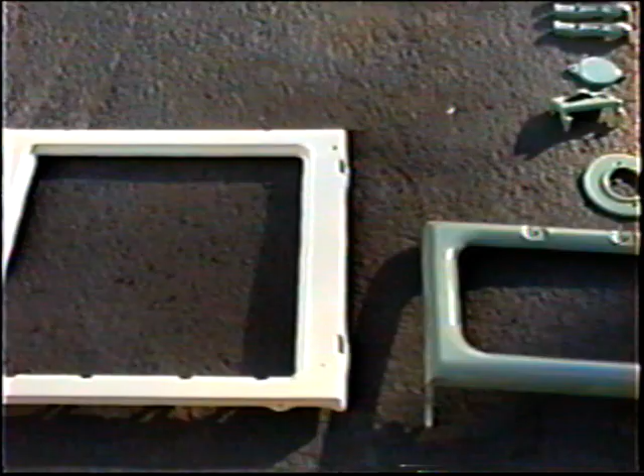I have to tell you, if you think I'm kidding, and this is really why I'm putting some of this on tape, this is Rust-Oleum Appliance paint, and you can't believe how nice this looks. With only one coat, I am even amazed. They're going to put me out of business here. This really does have a nice gloss, it dries up in about a half an hour. And we've been able to match the original Stewart colors pretty accurately anyway.

We're going to have all new brass screws when we're all done here, all new hardware. And what we're going to try to do is the back of it, this is going to be a breakfast bar, and the back part is going to be a wine rack.

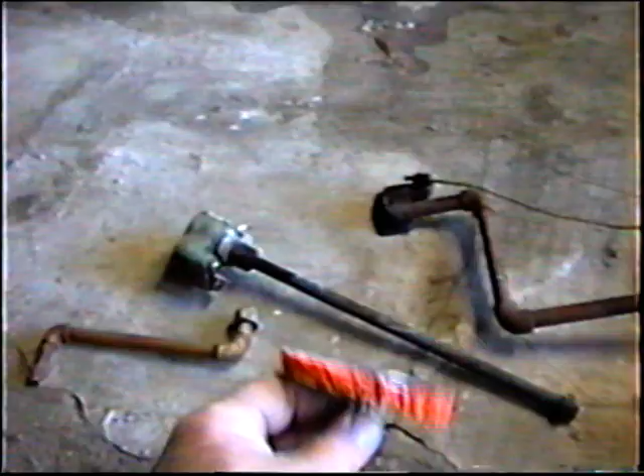This is that little thing we got for Christmas we're going to try using on getting some of the heavy rust off of these parts before we paint them.

Too bad they don't have a concours stove award. Maybe we'll get one at this year's Nats.

Looking forward to trying some of these new tools that I got for Christmas, and that's one of them.

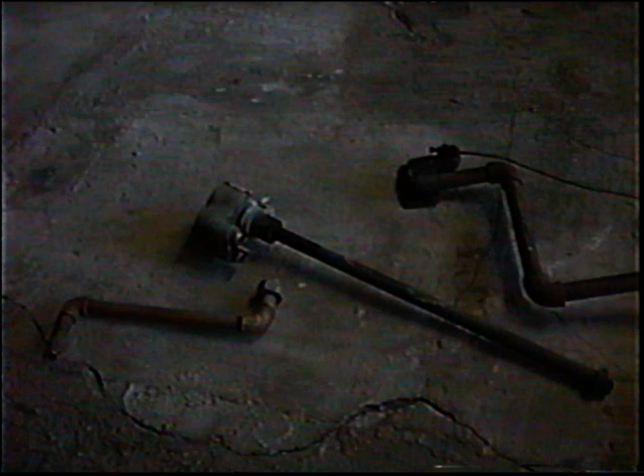These parts, it's really literally a lot of work going into grinding these down. Maybe a couple of days worth until...

Okay, well, actually what we found out was the little Dremel tool was the best thing for scratching it up. It was even better than an orange brush.

All right, it's getting dark. Bring the rest of the parts downstairs, and that'll probably be it for today.

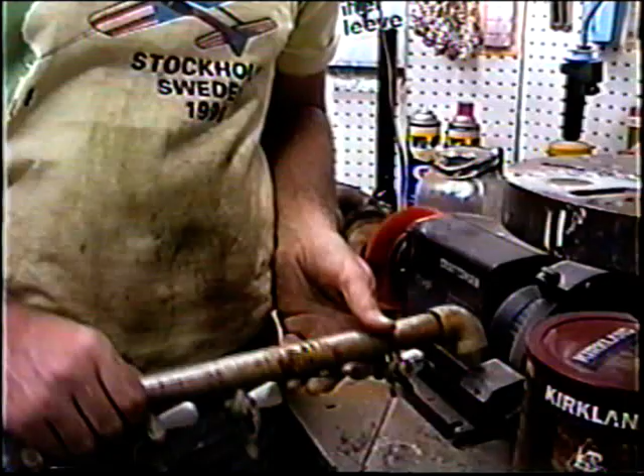Yeah, just let's get it scratched. This is fun. Anytime you want, come on over, I'll let you refinish your parts.

By the way, this orange wheel works great. This gives you an idea how quickly this comes up.

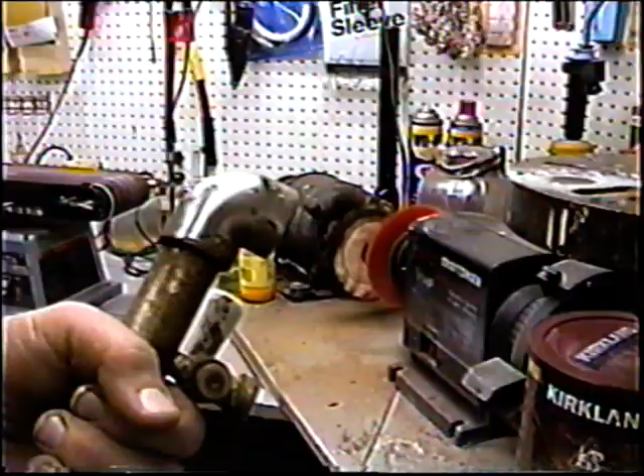Yeah, that Dremel tool cuts right in there, much better than that orange pad.

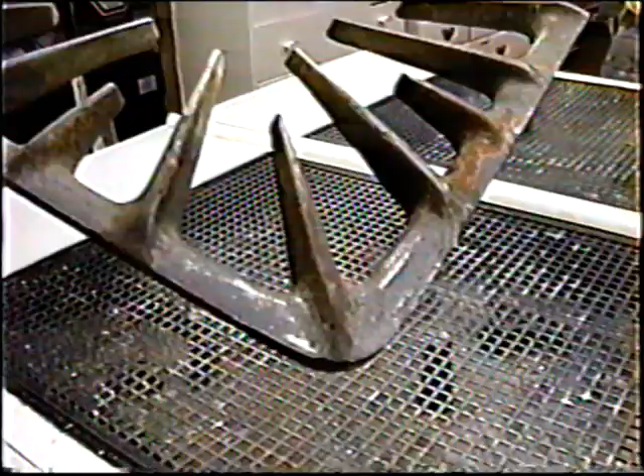I tell you, this Rust-Oleum appliance paint, absolutely beautiful. And it's coming together, maybe another day or two. The green dried up nicely today, and this gold is just spectacular.

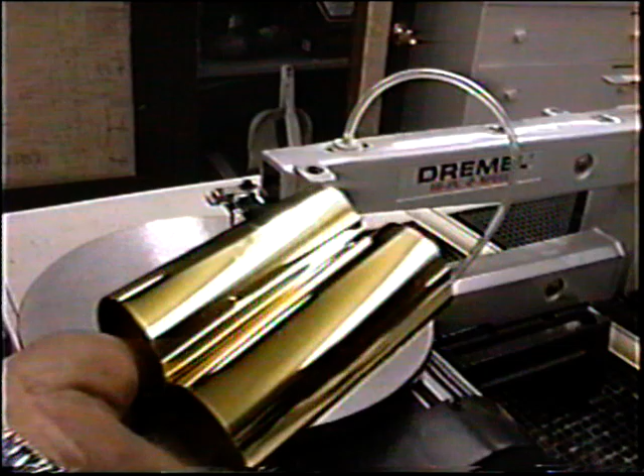Today I had to make some real precision cuts on this. I have to tell you, we got this saw for Christmas, Karen got it for me, and I've really gotten good use out of it. This is an excellent value in tools, even if you're making airplanes instead of stoves.

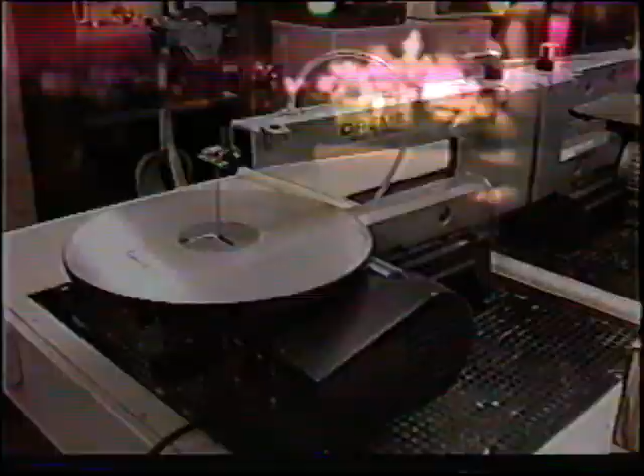Yeah, we've been working all day, all night. Little by little, you can see the fish are coming to life here. We even had a frog, found one in here before. One frog survived out of 12. Where the hell is he?

Anyway, but another day, check this out. Anybody who doesn't think I'm a workaholic, look at this. It's already way past bedtime. Got this guy put together. I'm putting on the side brackets. George gave me a hand before. Getting ready to make up the wine rack, and these are the pieces that go in there to hold up the glass.

Anyway, if you don't think this is a labor of love, Karen came home from work. She was so happy, she just couldn't believe how happy this stove was making her. And everybody knows how much I love Karen. Look at this, a lot of work.

Even a door, two-tone door, got the original Stewart emblem on it, and about 8 million more brass little screws and things to put in here. But I'm really looking forward to seeing this thing in one piece and getting back to the world of model planes. Closing in on having it done. I think it's really going to be a nice little focal piece for our new kitchen.

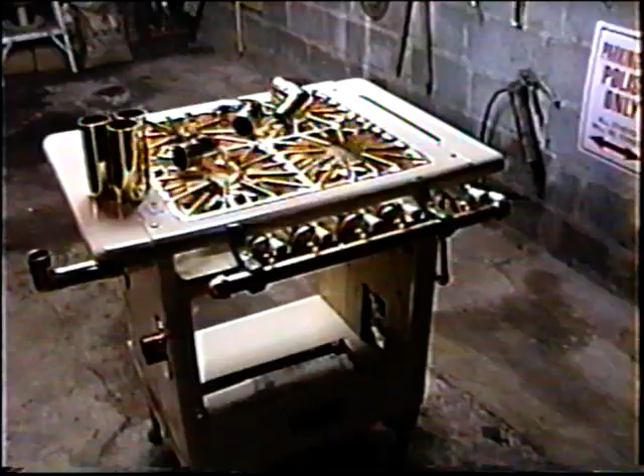We lined the whole inside of this with 3/4 plywood because it needs to be real solid, and that worked out real well. Then at the end of this there's going to be some brass supports when these all get tied in, giving it a real nice look. And then when it's all done we have to order up a piece of special cut glass with a bevel edge.

The first time every year that we open up the pond, which we did this last weekend, I get to see the fish swimming around again. Oh man, I'm telling you, if you never had a pond, you don't know how relaxing it is to just sit out here at night. And the other part of it, you don't know how much work it is. You gotta clean this damn thing out.

It was 2 days of solid grunge, munge, hip boots. But tonight I'm gonna sit out here, order up a Domino's pie, sit out here like a king on his throne with my subject fish. They really are fun, Karen and I really do enjoy this, and I'm glad I can share it with you. Life truly is more than just model aviation, but model aviation is nice too.

I really don't know what it is about fish that's so relaxing, that at the end of the day's work it's just nice to sit out here and check out all my guys, see how they've done over the winter. Looking for that frog, he was out here before. There's just something special about fish, I just don't know what it is. I'm really not sure myself.

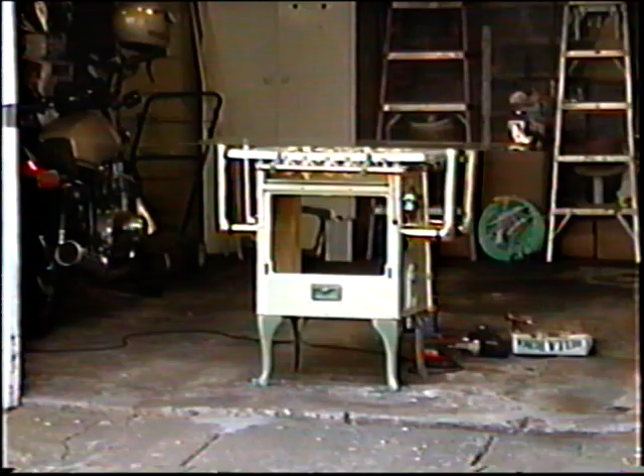Well, I've been trying to lay out the wine rack. The only problem is I only have one wine bottle, maybe I should make a WD-40 rack. Trying to lay out the wine rack, but this is not the real glass, I just used that to kind of level this off. By the way, I never figured I would need some special copper glue to glue these pieces together. So this basically is just down here so I can show Karen when she gets home from work. It's wine rack time, even when you can't go flying, you can always make a wine rack.

We're in the heart of beautiful downtown Carlstadt at the Venturini shop, right in the industrial park, the new home of Aerosmith Model Aviation, now with the Kyle Freeman paint job on the walls.

I wanted to sneak up on this old geezer. I like my old van, it's still in one piece, believe it or not. See if this bozo's running around in his underwear or something. Look at it, his professional job, he has Aerosmith.

Look at this Nobler. Wow, looking good, like a real shot before I come in. Yeah, real work.

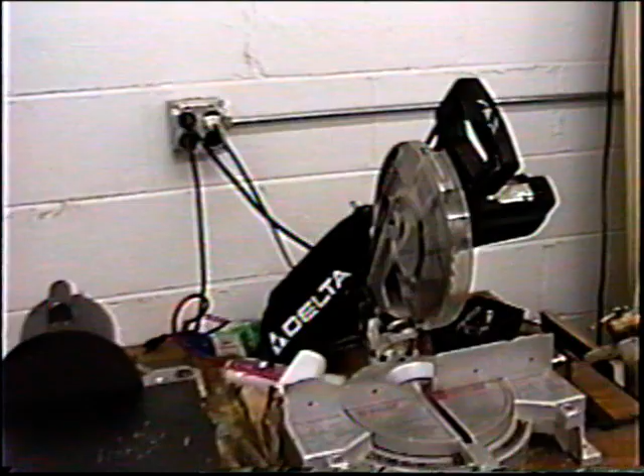I got to take my chop saw, I got to do the saw. Oh, got to finish that stove. Get back to modeling.

Now, I know everybody is probably good and sick of watching me make Nobler cowlings, but again, my philosophy is you always should be in the learning curve, always in the learning process, always trying to upgrade your techniques. Today I opened up the mail, Ed Gallagher sent me 2 more really informative videos, and they basically comprise molding a carbon fiber car body for a college that was trying to set the world's record for mileage, 1,000 miles a gallon.

It's a super nice video, and in fact there's 2 videos. I'm going to try to make a copy to loan out to anybody that would really be interested in looking at this. Or, of course, you can get them right from Fibre Glast if you want to own them. Both of those are good quality companies, by the way, Fibre Glast and Ed Gallagher - needless to say he's been a big part of everything that we do with Fibre Glast.

He's been real informative, helpful, and I noticed another package of his in today's mail. We probably got 2 in one day here. But anyway, I wanted to bring up a point. As I'm watching this video, I'm learning as I go. These people, now these are the professionals of the industry.

These are people actually holding classes, teaching people for $300 a day how to make composite parts. These people are having exactly the same problems I had. In fact, they screwed up the mold 2 or 3 times. They had to change materials halfway through making the plug. They basically ruined the mold a couple of times, had the same problems that I've had. And you know what makes me feel good is they're doing it, of course, in a big industry. Anybody that's familiar with cars knows that everything to do with automotive racing is multi-million-dollar.

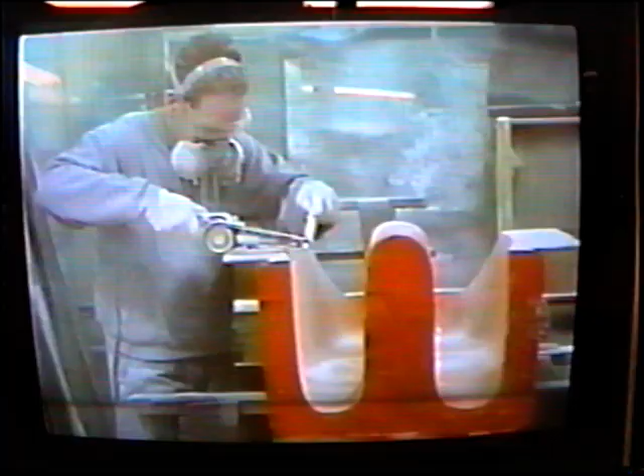We're trying to make relatively inexpensive parts. They're making a part that's probably cost a tremendous amount of money. But anyway, excellent, excellent information. This is the only part of the video. Now he's making the lower shell and the upper shell here. Again, if you have any interest in this, there's always something you can apply to your own modeling program, and I'm always glad to share any of the videos that I have in stock.

Now just a shot of the new mold. We're going to pour the rubber tomorrow. I'm letting some PVA dry on it. This is the one that we've got functioning now on a regular basis. But again, we're trying to make each one even better. You can see this one has put a little more polish into the surface, and I put a little bit of extra PVA just to see if this would make for a nicer finish.

Now, these are the 2 videos, and this is the little car that they're making, the shells. But again, if you have an interest in this, it's very difficult unless you have a source of somebody willing to help you or a video to help you. The education in this case is very difficult to come by unless, of course, you work in the industry.

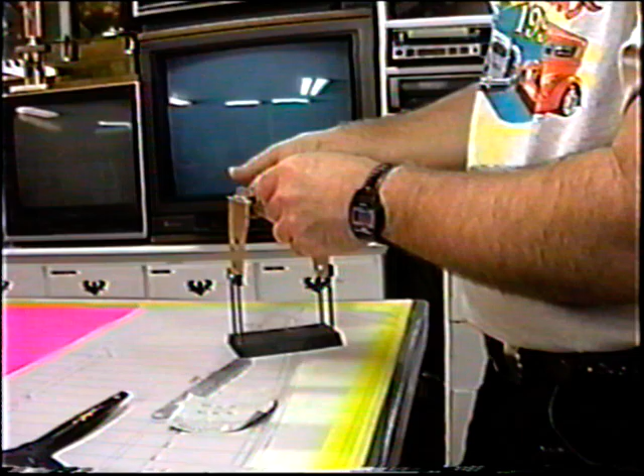There's nothing dumber in my book than you wait for this perfectly good flying day, you get up to the field and the props aren't - oh there we go - props aren't balanced.

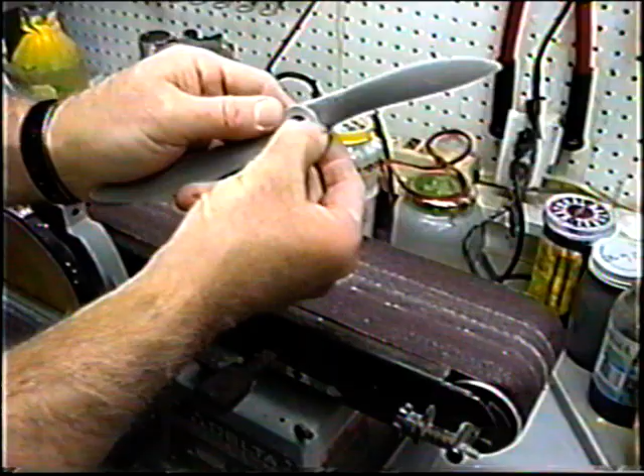Another thing with these props, you'll notice they have a perfectly smooth hub. Oh boy, is that an accident waiting to happen. And what happens, you need to over-tighten them, and this just becomes a clutch face. It gets smoother and smoother.

So I always have a little engraving tool, by the way these tools are about 15 bucks. This is a tip that's worth its weight in gold. Takes you 2 seconds to do this - that's a very cheap insurance policy.

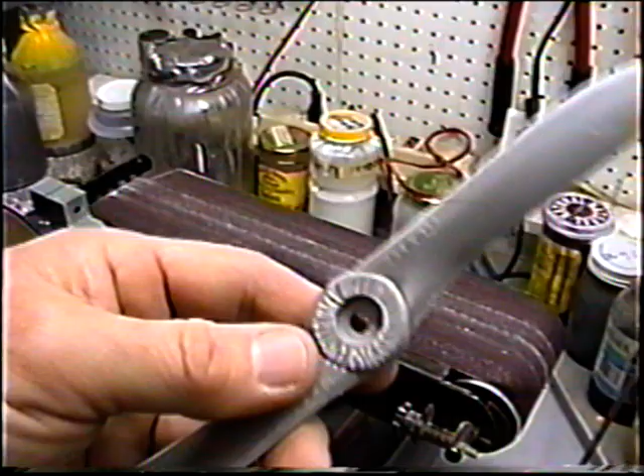Now it's like a sunburst, so what happens is these little roughnesses or rough edges tend to interlock, and you don't have to tighten the prop anywhere as near as tight. It also avoids the prop coming loose after the motor backfires or spins, and this thing will come off, the spinner comes off and hits you in the nose or something. Very, very cheap insurance policy to do that.

All props, all prop washers, all faces should be as rough as possible to get a good bite. Now, especially the back side, you notice the way these APC props are made. Let me just get this done.

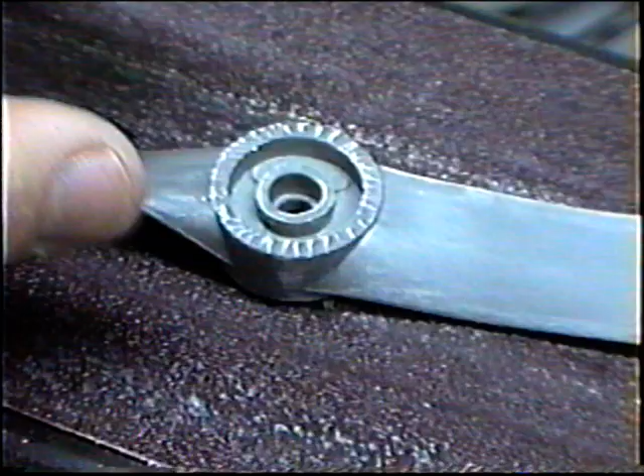Now, this is a great idea. It saves a lot of material by not having to fill that cavity with glass nylon. But look what happens here - you don't have any surface area, and that can be a problem. Obviously what you'd like to have is a surface area 10 times this amount.

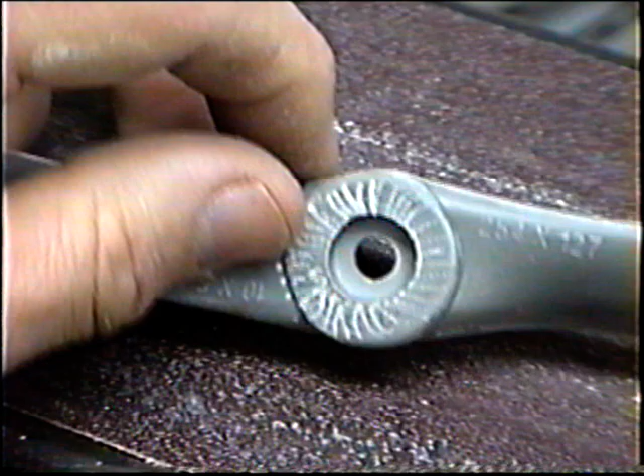Well, you know, the engineers have outdone us. Having these surfaces rough is really, really a good idea. That'll really save you a lot of aggravation. A great tip. And this doesn't even matter if it's a wood prop - I don't know if I mentioned that. But whatever, just get any surfaces that you're going to tighten into and compress and try to make a clutch face out of.

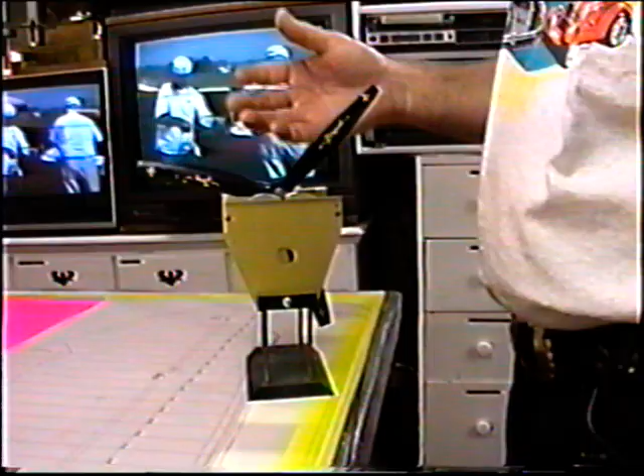Okay, one of the things - this is a Zinger 10-6. I got this from John Brodak. I want to see how these props balance. Now, you never can even assume that a prop's going to balance. Balancing it is the owner's option. But a 3-bladed prop's a little more complicated. You want to decide what actually is going to happen. Hopefully, we'll take the weight off 2 blades and make them as light as the lightest blade ultimately.

And there's a lot of ways to do that. But the first way is find the blade that's the heaviest of all. Right now we're looking at one blade that's a whole lot heavier than the other. I don't even need to go any further than that - I can see whichever one points down is going to be the heavy one here.

I can start taking material off the back of this, but the first thing I'm going to do, because this is a nylon prop, before I even balance these - now, you might want to scratch in a little number on a prop, 1, 2, 3. That always seems to help. But boy, get rid of these razor edges, no matter what.

And of course, if you're going to test 3-bladed props, keep in mind a 3-bladed prop is a prop and a half. Everybody thinks, oh, you just put a 3-blade on, it doesn't make any difference. It's a 50% more load on the engine. And typically, engines that like 3-bladed props are more like the grunt and groan type.

I just want to confirm which is the heavy blade here. It's real easy to figure it out too. And I'll just start taking material off the back. Get as much of it out as far to the tip as possible.

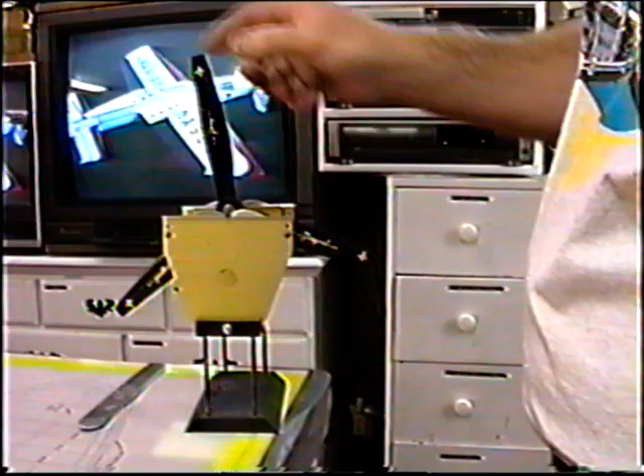I don't know if you can follow through with this. This is going to be the lighter of the two blades all the time. So it's going to ultimately be these two blades that have to be dressed off. So of the two that are heavy, which is the one that's going to be the heaviest of the two? Whoops, it's the one we're still working on. So again, I just have to keep hammering away, taking material off. But what will ultimately happen is two of these blades will become as light as the third one.

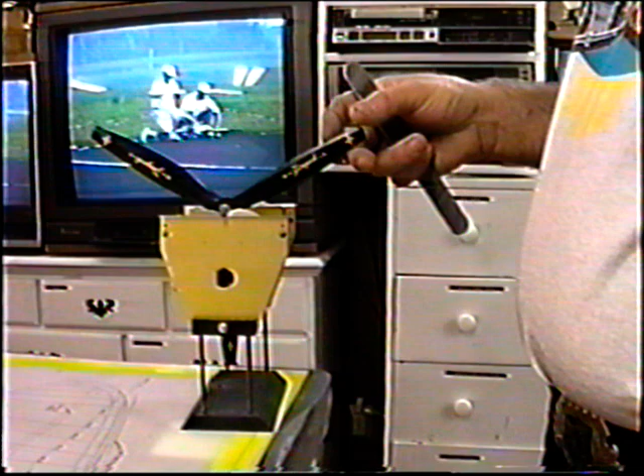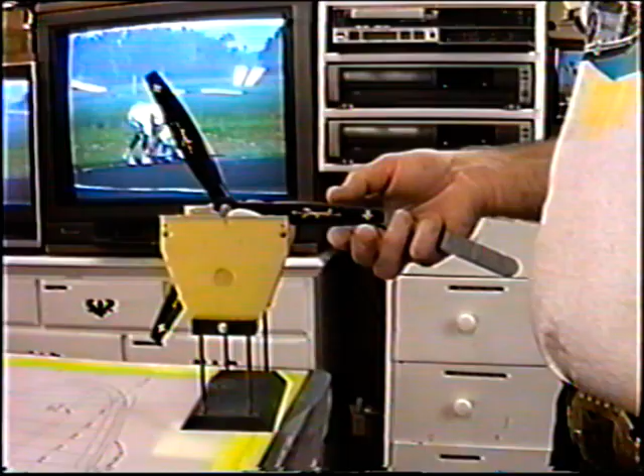Okay, now I've got the two that I'm working on. These two are roughly equal. These two are roughly equal. I want to go to... oh no, see this is now the little bit heavier. So now I know these two are the ones I'm going to have to work on.

I just hope anybody that buys one of these props or uses one, especially if you buy Bolly props, needs a lot of hand dressing. They're made, they're sent in a rough form. They're excellent props, they work excellently. But you need to hand finish them. You just can't take them out of the box and use them. And knowing how to do this is a big help.

That's still heavy. That's heavy. So this is now my light blade and my two heavy ones.

You can see as you sneak up on this, we're getting down to the home stretch. You want to always marry those two blades. This is still a little on the heavy side. A couple of swipes with the paper. Those two are now equal. Those two are okay. This one is a couple swipes of the paper on this one. I'll just radius the edge on this and we'll probably have it.

Now a lot of times you'll go too far. In which case, let's say the two blades that we've taken material off, you've made this the lightest blade. Well then of course you have to just go back. You're always working toward the lightest blade. There's no other way that I know of to do it accurately.

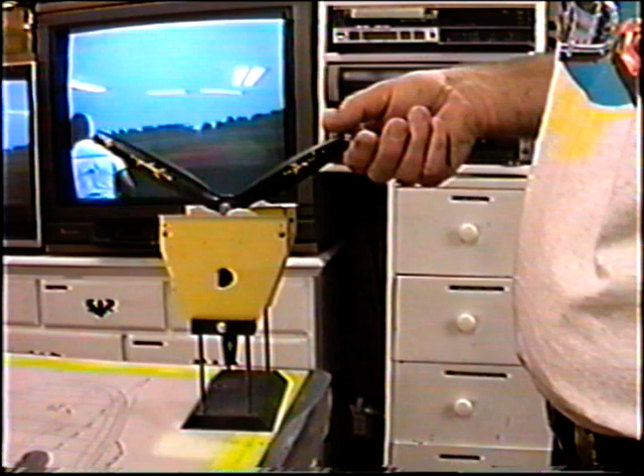This looks like the heavier of the two by a bit. That looks like the heavier of the two by a bit. Okay, and the last thing, of course, I want to mirror the hub the same as the APC prop. I'd like to see it in all three stations kind of equal. That one needs one more swipe with the paper.

You're always marrying the two heavy blades, trying to get them to the weight of the light one. Again, this took quite a bit of time. This took longer than I'm normally used to, but well worth the time, especially on a profile. And that one just needs one more swipe of paper.

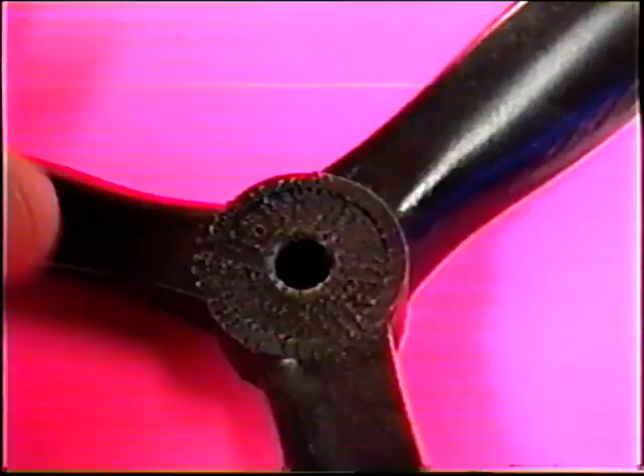You can see on this hub, and this is kind of another case of the engineers lost, the bean counters won this battle. This material should be solid on the back of this prop. You're losing all this surface area, which means you have to over-compress, over-tighten the nut, and the thing will have a tendency to come loose if you don't roll it. But again, a little bit of effort, a little bit of knowing how to get around that problem, and I hope we've just added two props to our collection for testing at K&B 40 with.

Let me tell you, I am so glad this project is nearing completion. This wound up taking a lot more time than I thought. The glass is on order and we've just put this away temporarily until the glass comes in, probably 2 weeks.

Well, it's spring in North Jersey. The forsythia are just starting to come out. Flowers are just starting to come out, and we're just starting to get leaves. Hey, motorcycles are even out. Starting to get some leaves on the trees.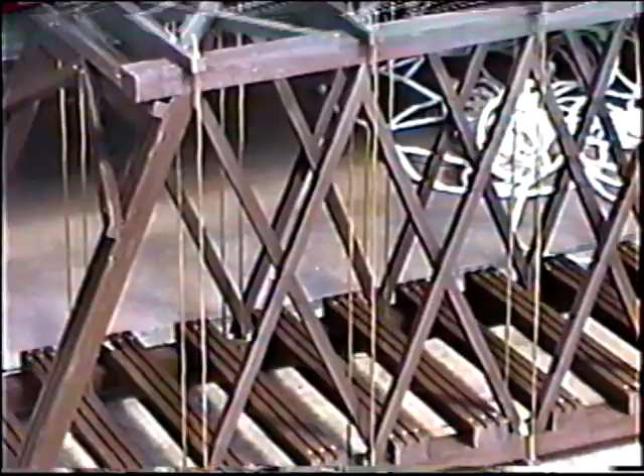See, here's a cool idea. They have the train run underneath a bench, and it keeps the rain off it. Isn't that wild? Look at this, they're actually making - maybe you buy these already built - a bridge that goes across the whole pond. Hey, we look forward to sharing this with you when it gets finished. Get busy - 2 bridges, 3 bridges, wow.

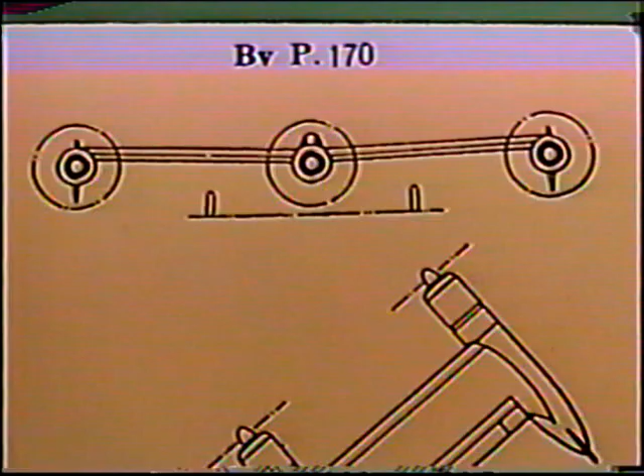This came from Larry Ladd. I just wanted to show this real quick. I'm sure Bandrock is watching this. Look at the 3 views on this. Kind of cool.

I don't know if anybody can read the caption, so I'll read it. It says, Windy, you said buy your grandson a Brodak Nobler and I'll give him a cowl - this is Larry Ladd's grandson Nathan. So he got an early birthday gift. He also has one of my pet Fox 35s.

Listen, Nathan, I got to tell you something. I sent you out 3 cowlings today, and what Larry said to send is some ones with little defects, and we got plenty with little defects. Don't worry about that, and if you cut them all up and chew them up, I'll send you another one. Anyway, look at these photos.

Hi, Uncle Windy. I got the kit. I need a cowl.

If John Brodak isn't watching this right now, John, I got to tell you, this is the future of stunt. Forget about all the nastiness. This is the reason we do what we do. But let me show you.

Remember that thing I just showed the 3 views of? Check this out. Nathan is working on this 3 19 McCoy powered BV P.170 semi-scale. Bandjock, all I can say is, this kid is going to blow you away. You are history. Bandjock's always trying to come up with these unique things - not even close. This is great. In fact, I'm tempted to send Bandjock some of these pictures.

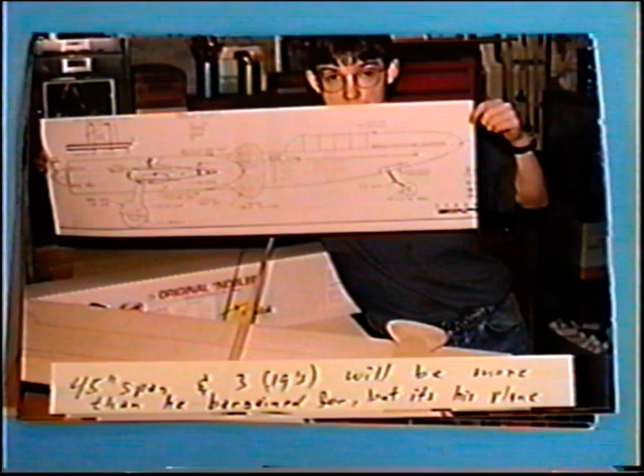3 19s. Look at this. Now tell me, if you didn't have a grandson like this, oh my God. Nathan, I'll tell you, if you make another picture like this - see this picture here? If you make a picture like this and put, Windy, send me a bell crank and horns, I'll send you a free bell crank and horns. I need the publicity. I'm not selling a lot of bell cranks today.

Nathan had an education with the Dremel, thinning the plywood, and the engine nacelles. Anyway, look at the work. Now, just think about it for a minute before you make a conclusion like this. Here's a young guy - this guy's like Mike Palko here. Non-standard pushrod horn connections, threading 440 onto the pushrod and securing with a shake-proof nut.

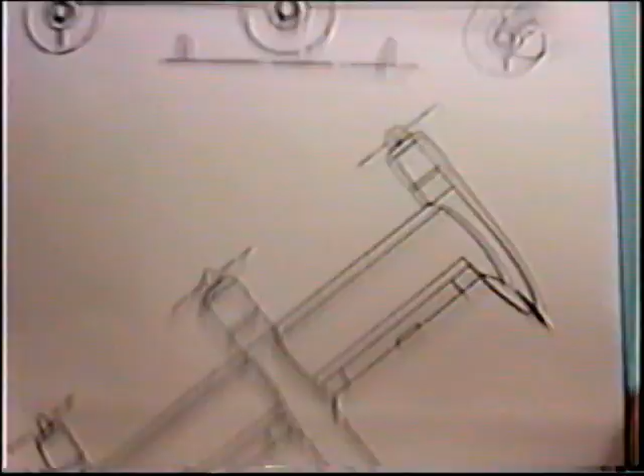Let's take one more look, Larry Ladd - I'm telling you, I am impressed. Larry, I'll sponsor this young man gladly if he keeps sending me pictures, especially when this is finished. Larry, I'm absolutely impressed. I wish we could get some video of this off of Wings. I know I've seen this on Wings, or something similar to this.

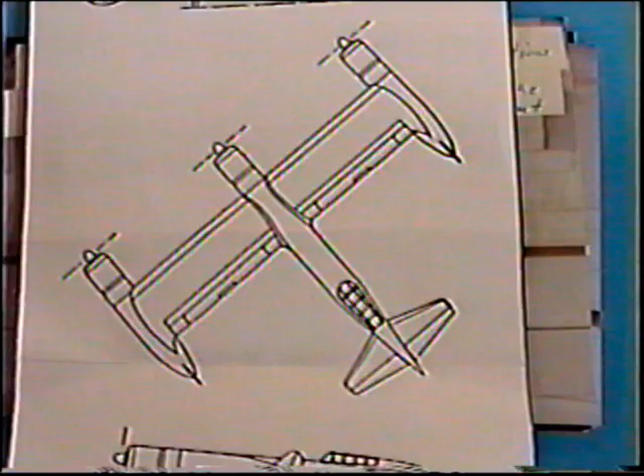Some of these wild German things that never came to fruition - is that a wild stunt ship? Bandjack, eat your heart out. That's all I can say. Larry, thank you so much. And Nathan, good luck.

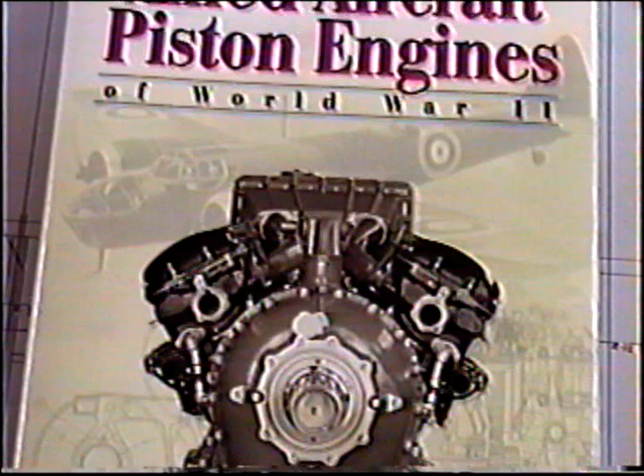This is the kind of reading material - I start reading something like this at 9, 10 o'clock at night and I don't get to sleep, I just keep reading. Brian sent us that video of the wood boats with the Allison engines, and a very long, detailed letter here, really too long to read on the video, but just to give you an idea of what kind of a book this is.

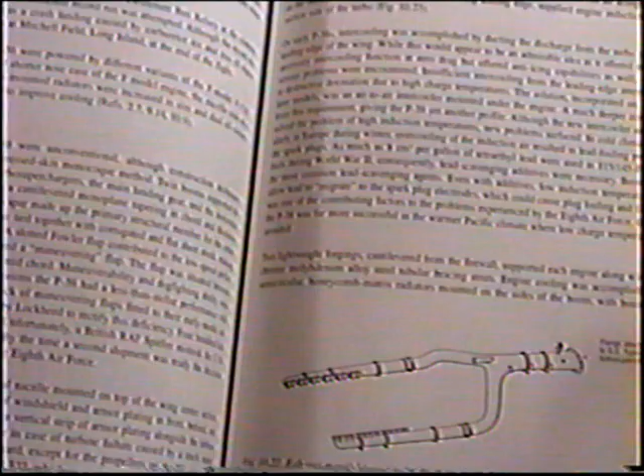There is just some really nice stuff in here, all the variations of these engines. Look at the exhaust systems here - I assume that's the P-38 with the rear turbos. If you have any interest, this would be a book that'll keep you up at night.

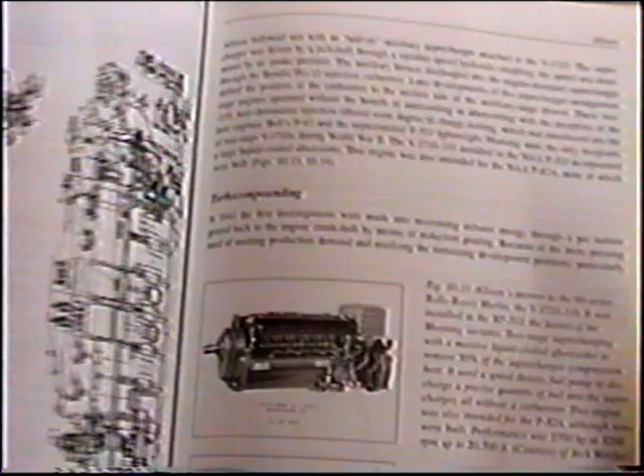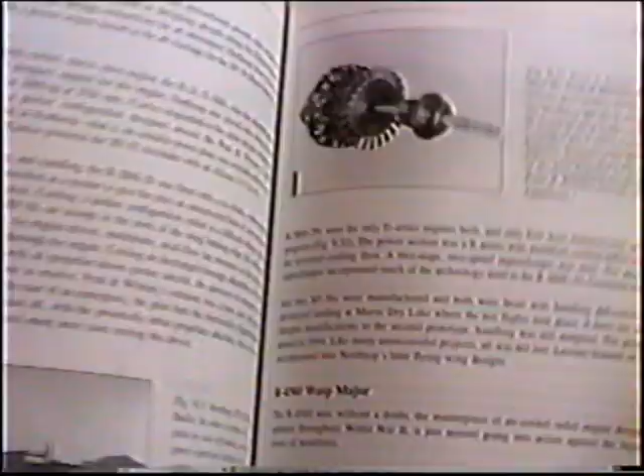This is the kind of thing, I bet the Julian Banjak will probably have it in their library, but there's just so many interesting things. And the thing that always impresses me about semi-scale is, once you get started in it, even with a little interest, it seems like it's an interest that never stops growing. Hey, Tom Morris's favorite plane, the P-61. So many nice things to think about.

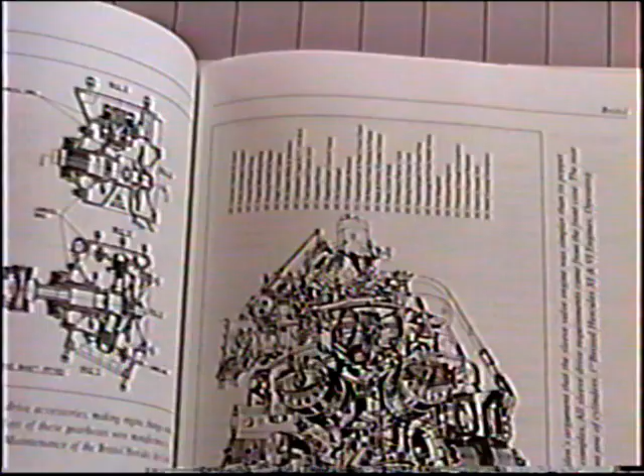Anyway, once you see - look at the Spitfire stuff. Just no end to it.

Now, speaking of unusual planes, Larry Ladd's son's Vultee XP-54. Nathan, I got to see that plane when it's finished. Look for those pictures in Stunt News, guys. I'll see if I can get Tom to print up a nice little write-up - in fact, I'll write a little thing up for him.

Until you realize the history of all the things that happened during World War II, until that history seems to make sense, it's always like a puzzle with pieces that don't fit, but...

Something you don't see that often - a B-17 with V-1710-89 engines. The prototype was destroyed as a result of an in-flight fire and the project was killed. Now look, can you imagine if that had worked out? Spinners on a B-17.

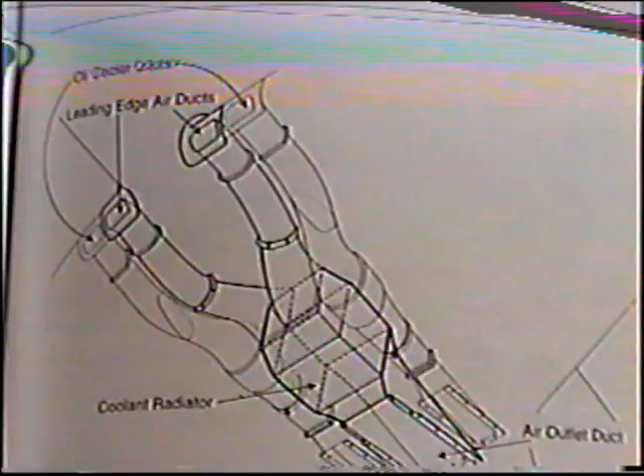Another model that would make a great semi-scale model - the P-39 Airacobra. Here's the kind of interesting thing you never really know unless you do some of this research: the cooling system on a P-39. The air got ducted from the leading edge of the wing through the ducting and then out a drop door behind the wing. I had never even known that.

Hey, by the way, Banjock, think about something - a P-51, you could put British roundels on that if you want to. And I could make an American version of the Spitfire.

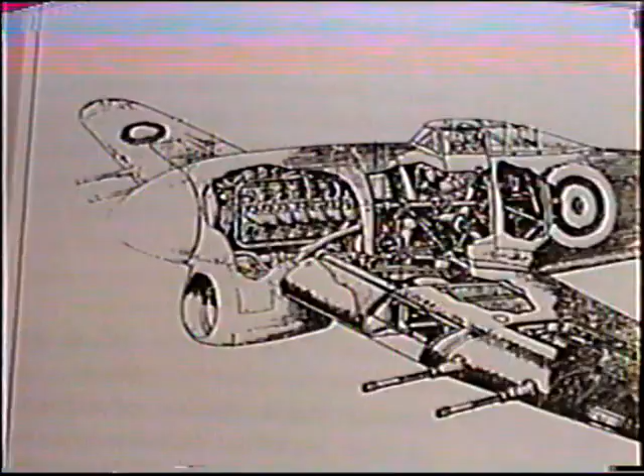Hawker Typhoon - this is a plane that would make a great stunt model. Look at the cannons, a big scoop in the front, nice molded fiberglass cowl. Nice Hawker Fury.

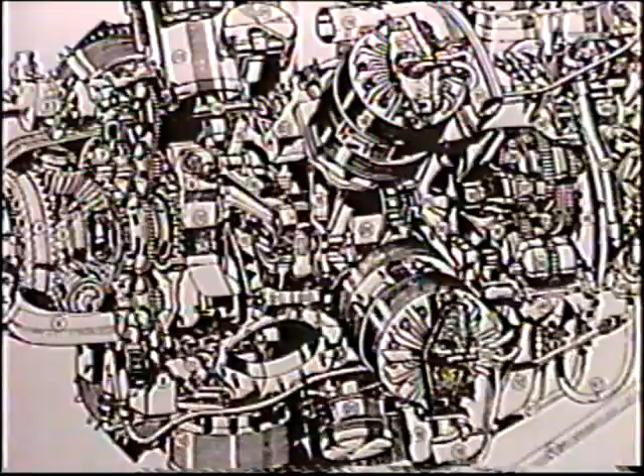See, this is the kind of thing, if you're interested in looking at all the details of any of these engines - really, really great book. Brian, can't thank you enough.

Beautiful picture here of the Martin Baker MB-5. This is the plane Frank McMillan and Keith Trossel made - Keith Trossel made a scale model of it, and Frank, of course, had several MB-5s. In fact, I got to fly one in 1995. Awesome - counter-rotating props, awesome. This was at the 95, 96 Nats, we had some of the scale flying to this.

And really, what book about World War II engines would be complete without some Spitfire variations? In my book, there's not many things sexier than those counter-rotating props - oh, man, when the Seafire is making a carrier landing.

And by the way, we got word that Aaronstein's Mosquito will fly soon. Getting ready to put the filler coat on it.

Stripped down Spitfire. Look at this, a Macchi MC-72. Oh, look at the engine layout here. Now this airplane, if you've never noticed, had two engines. Look at the way the engines were interconnected.

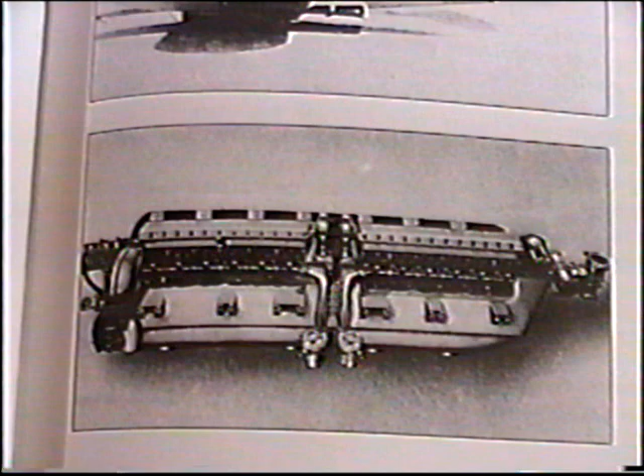Supermarine S6. Look how thin that wing is. Predecessor to the Spitfire.

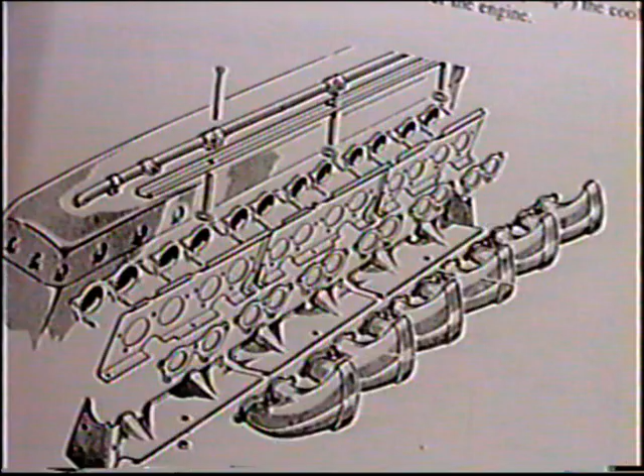Another thing, I was looking for details on exhaust systems, which we were doing 2 or 3 years ago. Could have used this book then. Look at the details, the flanges and the Siamese exhausts. Oh, these aren't... yeah, they are Siamese. What am I talking about?

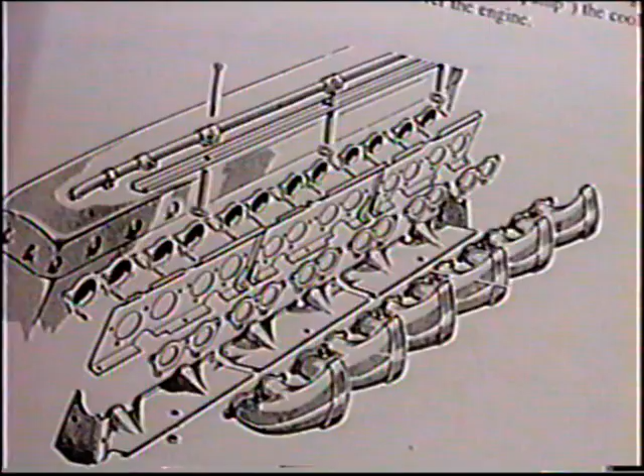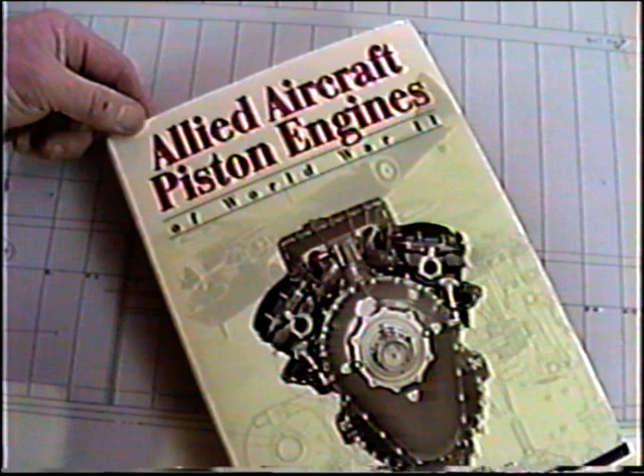Again, just a fantastic book. Something that would really hold anybody who loves this stuff their interest. Holding my interest.

I just want to read real quick an excerpt. This is from Brian's letter. On the Rolls-Royce video, during World War II, Rolls actually split the Merlin production line partway down the factory floor. Engines not deemed airworthy, either because of parts not to tolerance or Merlins returned for repair after battle damage, were shunted down another line and built as Meteors for the Cromwell tank.

See page 49 of the enclosed book. As ground engines, they didn't need superchargers. They'd idle all day at 250 RPM, then respond instantly when the Panzers came over the hill. They weighed about 1,400 pounds and put out about 600 horsepower. The Merlins put out a lot more horsepower but weighed close to 1,000 pounds more because of the blower.

They don't start in boats worth a damn. Bill Morgan of Morgan Marine on Lake George, that's the video we saw a couple tapes back, whom I've known for years and is now building new Hacker-Crafts, used to design and build racing hydroplanes. He put Merlins and Allisons in all of them and told me last year they'd often have to try to get them started on dry land and then get them in the water before they overheated. Just a lousy engine for marine applications. The Meteors, on the other hand, are sweet, and you can tell from the video. The British company overhauled that bunch in the late 50s, I believe.

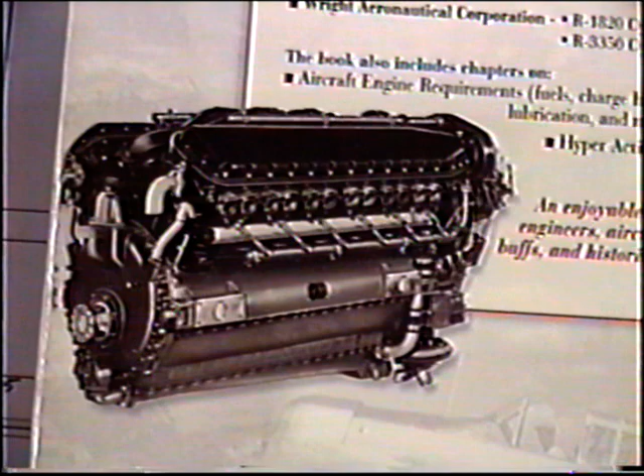As we start this is the famous 1998 flying season. Joe Adamusco gets the first loose prop of the year.

Smells like braking oil coming out of the motor. Oh, and we are ready. Oil on the jacket, oil on the hands, and we're ready. 1998 season.

No flying before 9, it's 7:30. Let's go, Adamusco, let's go.

Bob Martens. What's your wife's name, Bob? Joyce. Joyce, you're enjoying this crummy day, huh? Joyce, Bob, Joe's just showing off here. You can appreciate. You want to be in movies? You're in movies, believe me. All right.

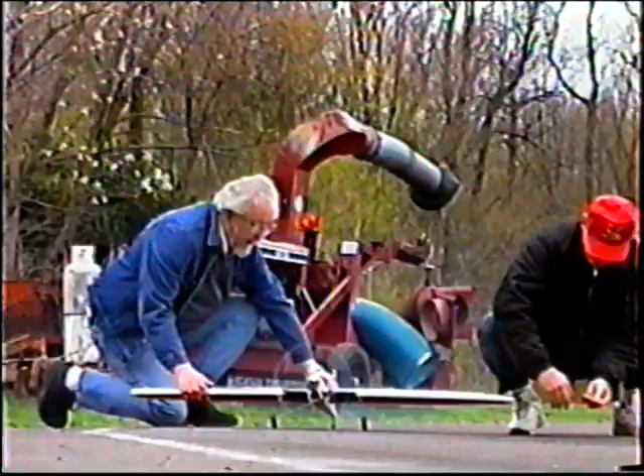Anyway, it's good to have Bob Martens with us. He's originally from Kansas City, I don't know, Topeka, and then Utah, and now of course working for Boeing. He's responsible for all the plans that we've drawn, the Spitfires, and the Brodak Cardinal actually too. So it's good to have him on board, good to be sharing the day with him.

I love this view. The view.

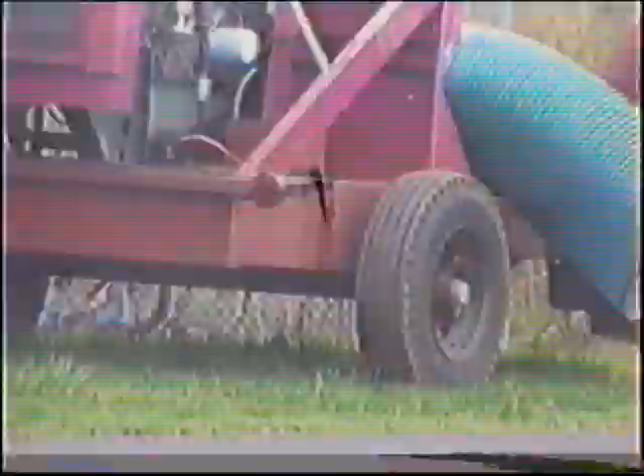One of my thoughts today is you really can't do what I'd call precision stunt patterns. The air here is really bumpy, and if you notice the wing coming around you'll see it's bumping and thumping, getting hit by bowling balls and whatever. But one of the things you can do today, and this is significant, is take care of a lot of the little trim changes - like getting the motor to run the same up and down, trying to get a handle setting. So what happens when you do have a good flyable warm day where you're not in your sealskin coat - you'll have a lot of this stuff more or less put in the bank.

And that's what we're striving for today - with Joe's eye, Bob's eye, maybe get Kyle to shoot some video later, get Joe to shoot some video. What it is, you can get a lot of these things sorted out that normally you'd be wasting a perfectly good day trying to do. This way you're gaining a good day by wasting a bad day like today, doing some of this rough - I'll call it rough trim.

We wanted to get some footage on the trim video we're shooting, but the problem is, again, on a day like this you really can't fine-tune things, but you can get a lot of the rough things. In other words, you'll always know, no matter how rough the air is, if it runs richer inverted than upright - which was the case on the first flight - I can tell right away the CG is real close to being where it should be.

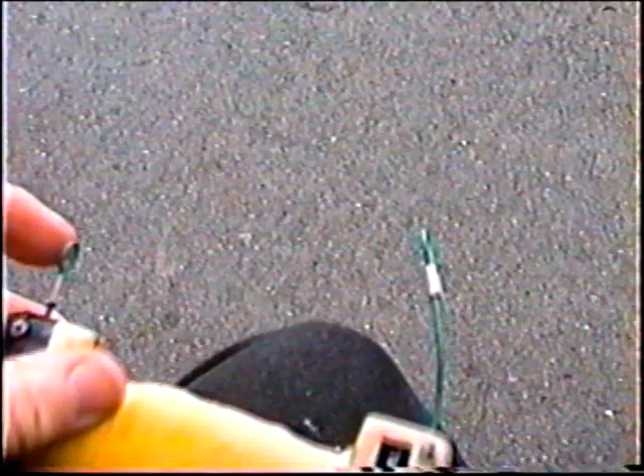Now you can see from the footage, one of the first things I'm going to do is replace the handle cable. I'm going to move it down a couple of notches - in fact, I'll move it all the way. It really was touchy. I'll start at the other end of this, and I have to replace the cable with these handles - of course you just clip one end and slide a new cable through. You can see from the footage we just shot, Kyle shot that footage, that it's a little bit over-controlling. So these are the things you can take care of on a really bad day - you can get this all out of the way.

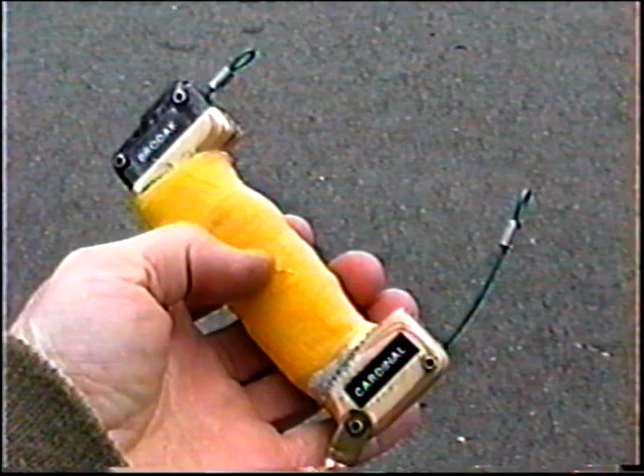Now with the handle all in the desensitized position, these are things, rough trim, I can get out of the way, even in this rough air. I can get rid of some of these major things, but I still need to check my notes - it still needs to run leaner inverted. It's still richer inverted than upright. So I'll make those two little changes and try to get another flight.

Okay, now with the handle adjusted, the tank is up even a little bit more. In fact, I'm almost out of adjustment here pretty soon. I'll try one more time.

The year started out bad and it's getting progressively worse. We really had some adventures on the last couple of flights. But the truth is we are getting some of the rough tuning done, like the handle. And now I kind of know what direction I want most of these things to go in, and it's important that I'm not losing ground. Had this been a really nice flyable day, I'd like to have this kind of in the ballpark tune so I can go flying.

Yeah, wind - it isn't really even wind, it's the turbulence at this field that tells you. It just bounces, and you don't want to get too dangerous. You don't want to get too cute.

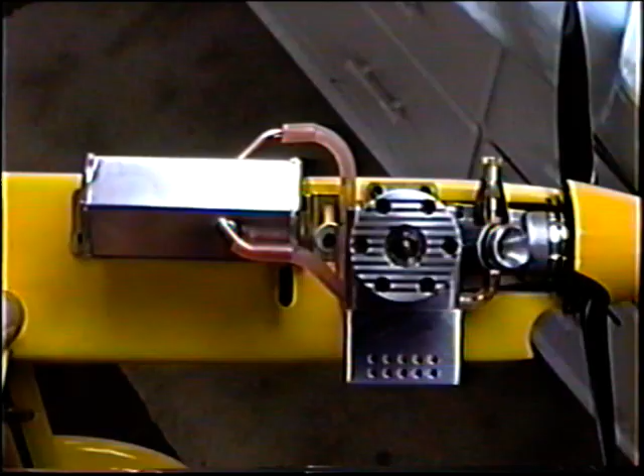Just look how much of that tank is above the glow plug — almost the whole tank is above now. And again, this may vary and change. That's why I want to do this with a little tape-on tab until I get everything finalized, and I'm sure that tank is one of the things that's not fine-tuned yet.

Now, if you make up a little piece of tin, a tab like this, here's the advantage of this: you don't want to go tweaking flaps. What you want to do is get that to set right in that crevice. Now, if this isn't big enough, if we need it bigger, of course we can just reverse it and run it that way. We have two choices.

You don't want to bend it right down the middle — that limits your choices. Let that sit right in there, and I'll just run a piece of Scotch tape across it for now. This is just a temporary thing. When we have the exact fine-tuning on the tank, this and that are going to go hand in hand.

Then we'll paint it yellow or put two little recessed blind nuts in here or something, make it a permanent part of the plane. Or if we want to take it off, we have the option of just taking it off if we wind up with a tank or a motor combination where this gets more in alignment.

And you want to make sure this isn't interfering with the flap, of course. Just a little wrinkle out of there — this is just ordinary hinge line tape. That'll temporarily hold that in place until the next time we have to trim it.